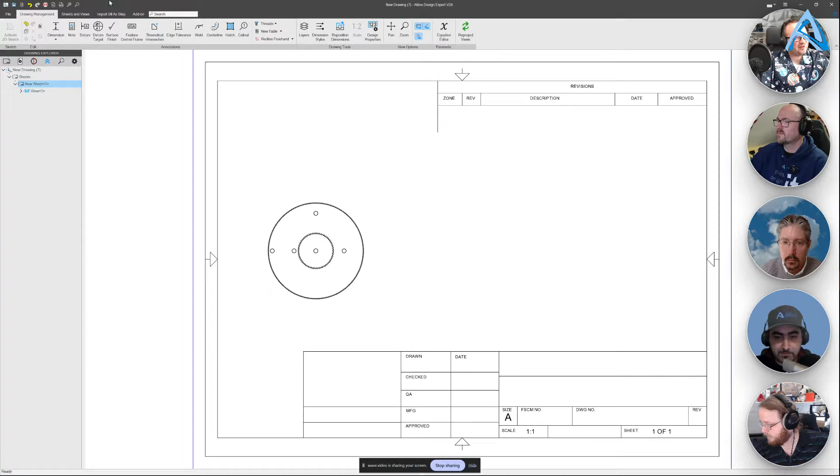And then we'll actually go to the bill of materials, and I'll insert a standard template. Now, it may seem kind of strange to have a bill of materials for one item, but stay with me here. If I double click on this, we can bring up our bill of materials editor.

And then over here, I can right click and choose column and insert, or just go to add column over here. I'll hit this X and remove everything. Then when I go to my properties, under design properties, there I have my weight. So I can add that as a column, and it comes in beautifully. Then I can just add this, maybe implement it right into my bill of materials or something like that.

I can also specify with a new name. Maybe we'll add in kilograms or whatever your preferred unit is. Now the question is, what if I want to change something? So I'll go ahead and save this into my PDM.

And then we'll say edit our 3D model. So if we need to change the material, right now we have 6061. I don't know, Chris, is that one of your favorite materials? Yeah, it's not bad.

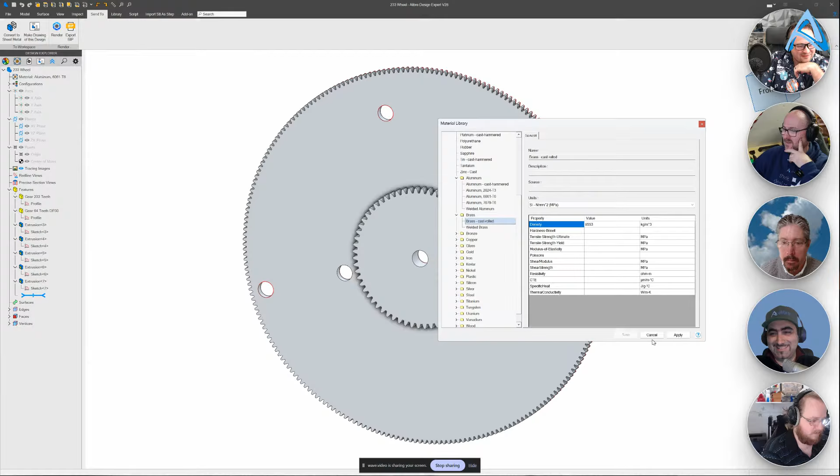It's easy to machine, that's for sure. Maybe we'll make a brass gear. If we apply that and save the changes, when we go back to our drawing environment here, I'll start reprojecting things. And sure enough, our weight updates.

So we do have a linked updating weight. Actually, the Alibre logo is blocking my beautiful face here, so I'm going to get rid of that for a sec. What if we have an assembly and we want to do this? So just a few finer points for working in an assembly.

I'll pull up my in-progress gear assembly. It's kind of half modeled right now, but you can get the idea. Lots of gears turning as we're loading this up. So we have this interesting assembly. I'll go ahead and make sure that I send the most updated version to a drawing environment. How do we keep track of weights in assemblies?

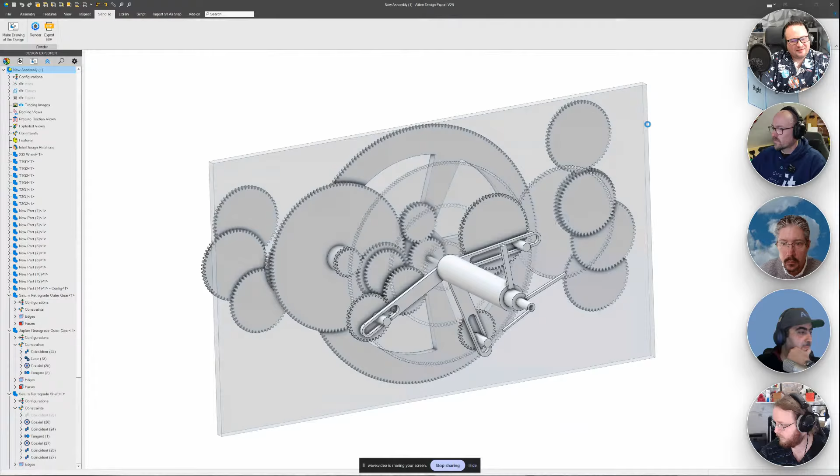That's awesome. Not to be a stickler, but if we're working in kilograms, is that not the mass of the part instead of the weight? I love it, thank you. I could be completely wrong, I am out of date on my physics, but that sounds about right to me.

I'm way out of school, I've got zero knowledge on anything now. In a previous conversation with Adam, he said he's not an engineer, right? But I think one of his ancestors is whispering in his ear right now. That is very correct, actually.

And it's the same thing about pounds. If you want to be very strict about it, it's kilograms of force as weight, right? But if we're honest, when we call out the weight of a part, we use the wrong word. We want to specify the mass, right?

Well, at least that's amazing. That's a comment that guys like me appreciate, Adam. Which is why we don't have many friends.

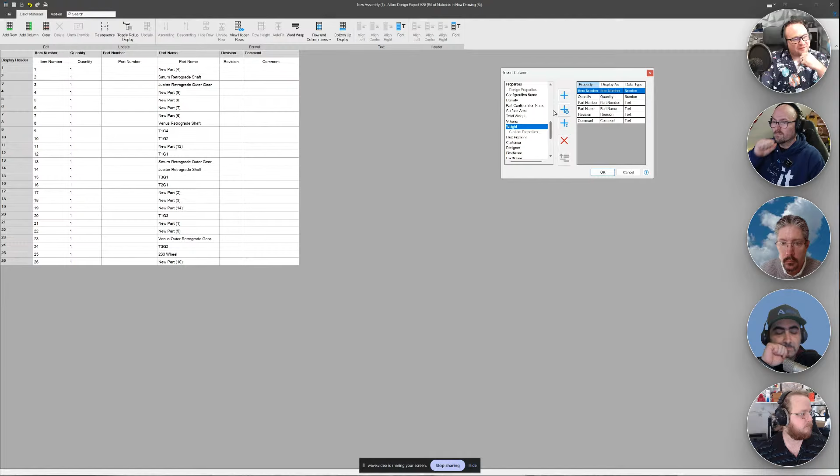Perfect, so back to assemblies here. If I add a column and scroll down, right under design properties, we'll add a column for weight. Takes a second because there's a few parts at play here. We're going to say design properties, weight. There, I click the plus, and now weight ought to show up.

There it goes. The obvious thing is we're tracking the weight of all of our individual parts, but we kind of want to know the weight of the whole assembly, right? So down here, I can right click and under column, we'll add a summation row for that column. And there is the total weight of our assembly.

So easy way to track things. These are updating properties and sure makes things easy. So that is how we do weight, a little bit different than working through the custom properties like we typically might. Hopefully for the person who asked in the last live stream, that's a great solution. This might be one to do a clip of and post separately, maybe.

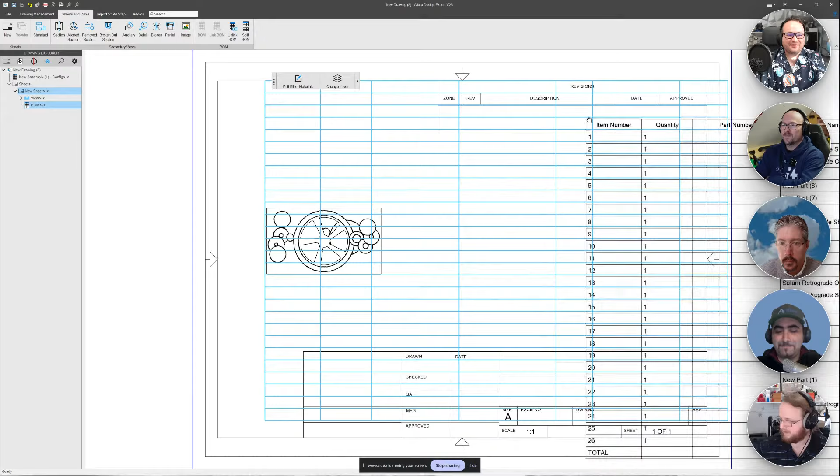Yes, we can see that. I've had a lot of background projects that's stopping me from doing the videos, but we'll be getting into that too, because that would be a killer clip.

Can I just say here that this has already been covered by Joseph in an amazing series of videos he did on drawings. This methodology here - if you need to output any sort of 2D drawing for your parts, you need to watch that series because I think I knew some stuff and I learned quite a lot. So definitely value there. Well, thank you, Costas, I appreciate it.

I see that we've got an EZ CAM user from Washington. That's pretty cool, an Alibre and EZ CAM user. Good to have you with us.

Absolutely. We got Fort Worth, Texas, Michigan. What kind of support does...

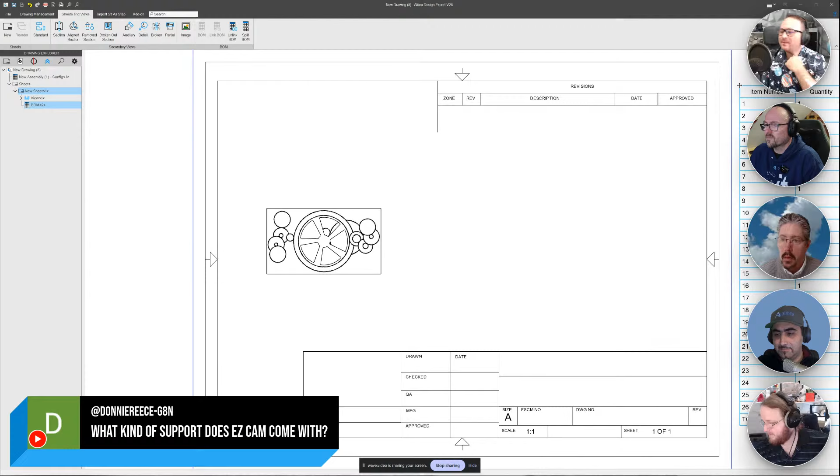EZ CAM come with? We offer a maintenance program through Alibre where you get a year of support. In that support, you get custom videos as well. So when you have a project and you're getting stuck, we'll work a video around your project so you understand it. If you have 2 monitors, you can follow along with that. I'm always posting something either on YouTube or Facebook.

I'd say there's a couple hundred videos out there. Now we're taking advantage of all those topical videos and placing them in AI. So if you have a question about anything about EZ CAM, or even Alibre, we added Alibre to the AI as well, so you're off to the races. We do have PC to PC sharing, so you can log on to my computer, I can log on to yours, and we'll interact that way in real time. If you have questions on the phone, I can take over your computer and give you a walkthrough.

That's awesome, thank you so much. I've got another one here: how do you show center of mass on a part?

I can take that one unless someone else is hungry for it. I know how to give you the actual location of it in the physical properties, but I don't know how to show it in the part, if that's possible. Sounds like a really good one. Yeah, that's a great question, thank you for asking it.

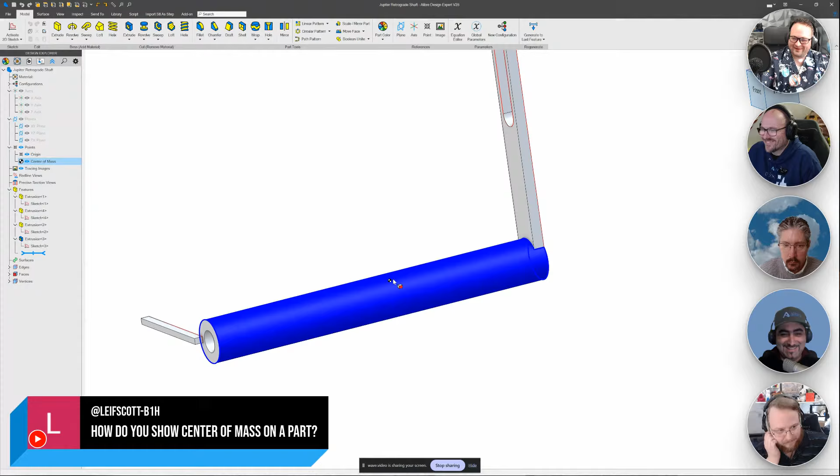I'll grab a kind of odd L-shaped part right here. In our design properties, we have the center of mass, and you need to have the points showing. Oh, thanks, Costas. Yep, so there's our center of mass right there. Just be sure to show your points, folks. Nice and easy - you can dimension it and all that. So that should work.

What else have we got here? Oh, here's a good one. Does EZ CAM have post-processor capabilities to work with small Makera CNC machines? Okay, are we talking lathe or mill? Our post-processor library has hundreds of post-processors available, and they make excellent templates.

And again, if we're relying on AI, what would take me hours to do, AI spits out in a minute, and we'll add what you ask it to add to the post-processor, remove it, or rebuild it for you automatically. I've been developing post-processors for over 25 years now, so in most cases I can deliver something based on the information I receive. It can be a quick turnaround.

We ask that you send us a sample program that runs your machine. Sometimes we require the manual - some people take pictures if they don't have a PDF copy. So yeah, we support anything that has a servo motor attached to it. Maybe 5-axis positioning, not wrapping yet.

I had this machine back here - I was using EZ CAM but didn't have a post-processor for it. I reached out to Chris, and he got me a post-processor. It was an awesome process and quite painless. So I've experienced the support there, and it's been really good. Chris does a great job.

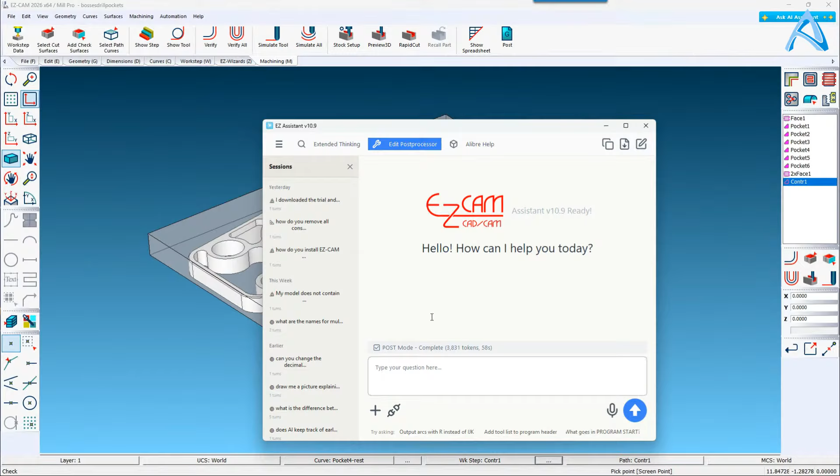Drag this over. Now that's my active post processor. Let's get this back over here. And I'm going to load it. There's load the post processor. Edit post processor is up at the top.

And it automatically uploaded the CNC file, which is all the data, all in one file. Whereas the post processor, you have program start, you go into different sections to build it. This is all of it tied together.

And I just need to ask it a question. Let's say, add a tool list to the beginning, and everything that is needed for CIMCO simulation. That's cool.

That's pretty cool, actually. So for the uninitiated, what does that actually mean? For the person coming new into CNC, what does all what you just said mean?

So the CIMCO, what is that? Sure, I was going to get into it when it pops up. CIMCO requires a setup of your stock. It requires tool lengths, tool diameters in order to get it right. So you would have to build a library. Well, in essence, what AI is doing for me is building all the background information that makes CIMCO simulation work. It's all being generated here.

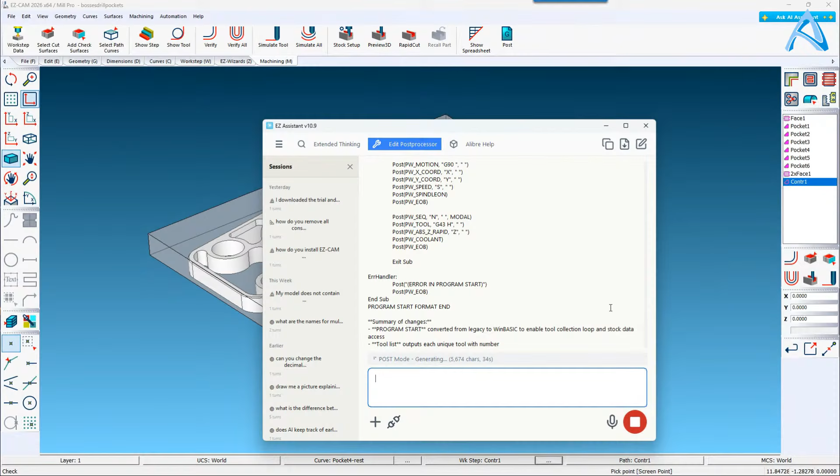Now we had the legacy CAD, legacy code, and now we're building what's called WinBasic, building basic code, and it says save and import to EZ-CAM. So I made all the changes. This would take me hours to do otherwise. So now we're going.

Let's see. All right, let's post it. Just walking through my operations. Let me just drag CIMCO over onto the main screen here. Okay, so that was the legacy.

I may have missed a step here. Let me remove that, I apologize. Doing everything live always gets you.

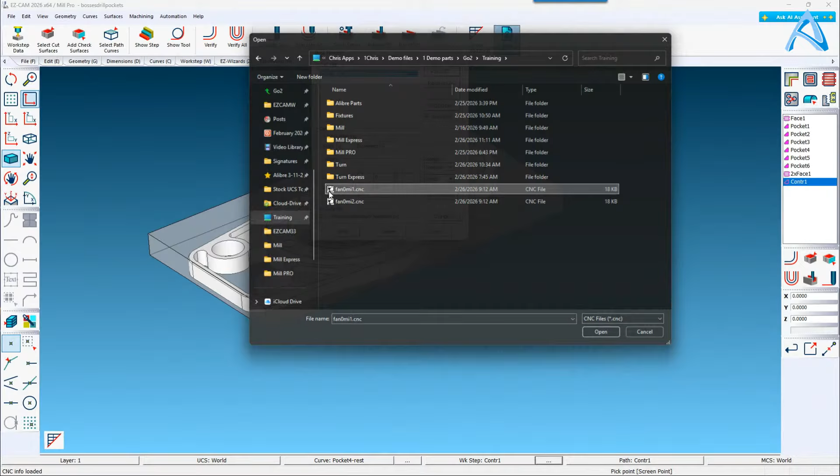Great new tool, this is recent. This is something we just had developed. Our developer is outstanding, what he can do just blows my mind. So let me get here in training, upload the FANUC post processor. I'm going to post it in regular code.

And it's going through the strategies. I see that, nice, right. Okay, so... pause.

Okay, so here we have it. We just have that, there's our spindle, the direction, the coolant. If I was using coolant it would show up. So that's the old program style.

Let's go to our AI assistant, let's just run it through again. This is good, you guys will get an opportunity to see it again and solidify it. All right, so it's uploaded my CNC file. Ask the question again, maybe I can do a copy and paste here. I think that if we repost, because I think that was a CIMCO thing.

Okay, all right, let's see. Post, CIMCO is a great program. Oh no, it's still the same thing, huh? Okay, yeah, I didn't run it through the AI just yet. So I'll come down here, Control V. There we are, send it up again. It's pretty quick.

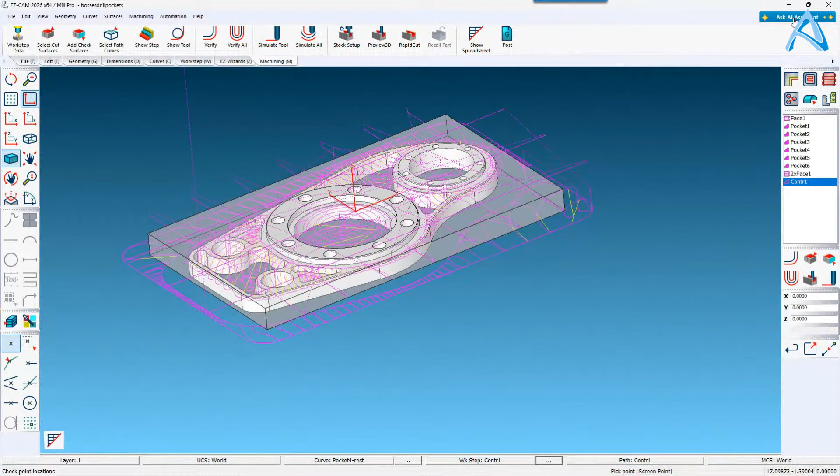Let me just clear the conversation. Post mode, I'm on post editor mode. This sends it up - attach the current post processor from EZ-CAM.

Now Chris, I've got a few other questions I can hit if you want to work on this in the background. Yeah, please - why don't we do that to keep a nice even flow, and then I'll just go 'yahoo' when it's done.

We did it, first try. Well, that's a great one.

Yes, this one is a little bit less asked about, but I really wanted to get to it if I can find it here. It's about educational licenses. Let me hunt it down in the comments. I just saw it - right here, I got it. Thanks, Adam - Adam's the hero that saves us all.

Do you have any plans to offer education-based licenses, college and K through 12? I think if you're looking for something big, contact help@libre.com or hello@libre.com - send an email there if you're a school. We also have $100 for pro and $200 for expert with a valid student ID. So keep that in mind if you are in the educational sphere.

I also have one: will AI be part of a permanent license, or do you have to be under maintenance to make use of that?

I think that's for EZ-CAM when you have a second, Chris. Oh, what was the question again? Wow, this is - I'm sure. Yeah, will AI be part of a permanent license, or do you have to be under maintenance to make use of it?

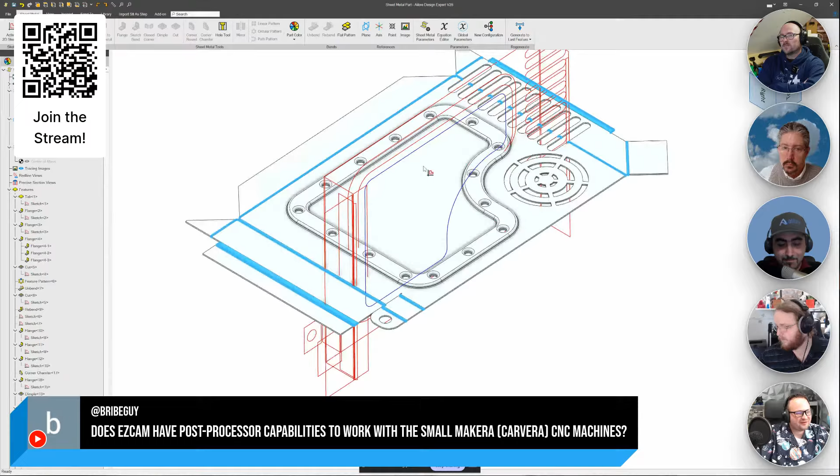So for sheet metal, does anybody want to take that question? That's a nice looking part too. Thanks, this is from our beginner course. Check out our beginner series, we make this video by video. We have a flat pattern that we can flatten out, and you'll see that our stamped area stays, because generally when you do something forming, you do that first and then cut out your blank for sheet metal bending. But how do we calculate the lengths? Different materials are going to have different bends and stretching when you go to bend things, so we use K factor.

Let's go with adding a flange here. Now when I go to add this flange, I can go to advanced over here and see that we have K factor, and we have a built-in K factor value for whatever material we want to use. Under bend allowance options here, we also have unfold lengths, so we can set it that way as well. When we go to flatten things out, those bends and stretches are built into our flat pattern, and that would be the approach I'd say we use to calculate sheet metal part cutting lengths. Hopefully that answers the question.

I haven't been a career sheet metal guy, I've only used it a few times in the field, so maybe there's more to that question, but that would be my short answer. Let me know if I hit it or not.

I'll second the comment, there's nothing AI about Steve's channel. In fact, I've watched him fix headphones live on the air. That was my favorite live stream moment, because I'm sitting there going there's no way Steve can fix that circuit board on those headphones, and it worked. And I think you're wearing them right now. Look at that, there you go.

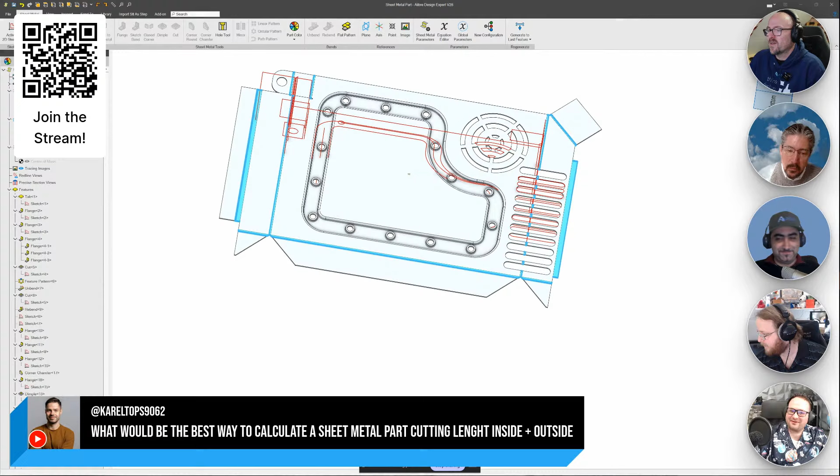Speaking of AI, I had some success. What happened to me was I had opened up multiple documents, figuring I'd save time, and what I did was I was working with a post processor from the previous program. So here we have our stock information, we have our tool list, that's all been added. If I go in to post, and we're going to save the CNC, we want to make sure we save it, I'm going to go into the editor.

We'll go to formats, program start, and now it's all Visual Basic. Yep, there you go. Okay, yep, so sorry about that, guys. Golf clap for Chris. So sorry, but... former mediocre machinist here.

Question: first of all, CIMCO is a great program. I loved it, especially when I realized I can actually mirror a code inside CIMCO without even needing to go into CAM, which was useful on more than one occasion. Does CIMCO come with a license of EZ-CAM?

Yes, it works a couple of ways. If you're on maintenance, then if you have a perpetual license, at the end of your maintenance you'll be stuck on the same version, I believe you won't have any upgrades to that. It's looking at your license. If you have a subscription service, of course you maintain that, you're going to have it. And if you don't renew, EZ-CAM will know that, and you will not have access to CIMCO.

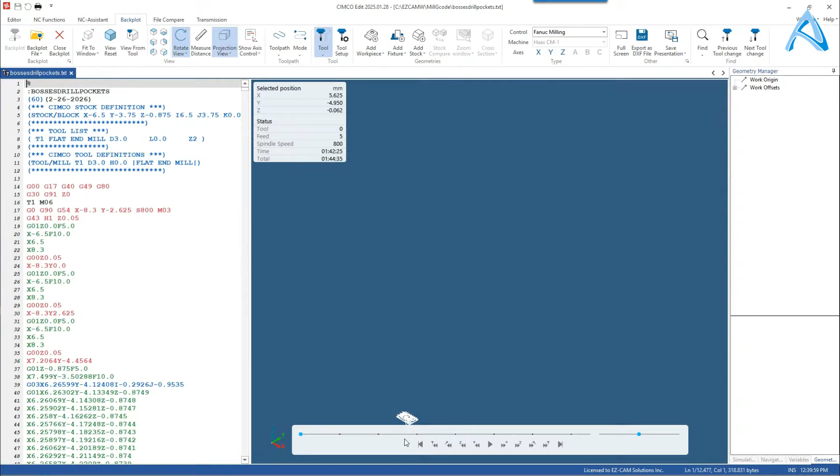Just opening CIMCO now. Then what we're going to do is go to the backplot. Okay, so this is so useful, guys. This is so useful. So here's the wireframe. Even that is extremely useful if you know what you're looking for and how to read it.

Exactly. And if we didn't have the post processor developed for that, you would have to go into your tool setup. Even tool setup, I know. Yeah, tool setup, which means making your tool libraries twice, which is not practical, right?

Let me just simulate the stock here. Add stock.

And a special thanks to Don Reese. I love that comment, I'll show it one more time. Chris is really good about helping, and I always get quick responses from Chris.

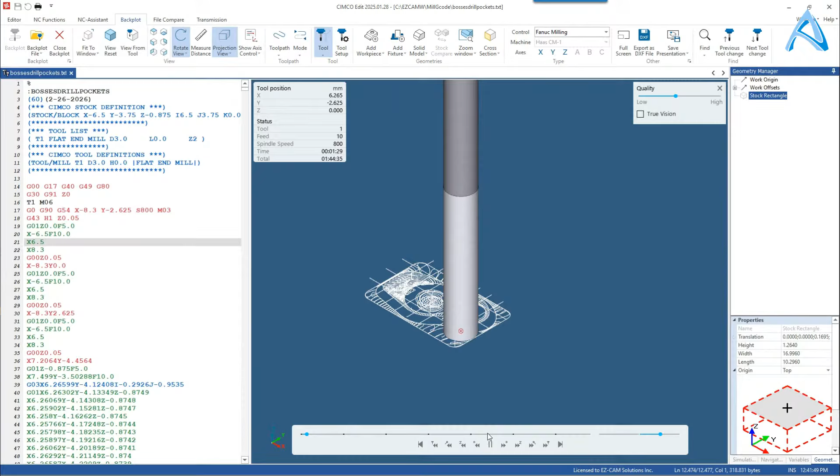Now, I don't know if I knew that you were such a great machinist, Costas. You're like an onion with new layers of surprises. I'm not that, no, because I've come to learn to respect the word machinist, okay? And I'm not. I'm a decent CAM programmer, but I'm a very mediocre machinist, trust me on that. Well, that's a step above me, I don't know about anyone else. The more I learn, the more I realize I don't know what I'm talking about. Yeah, but isn't it like that? Isn't it amazing that it is like that? Right? And it's so paradoxical that those skills to not know what you're talking about is also correlated with competence.

Yeah, it comes to bite you, doesn't it? Anyway. Yeah, the first thing I learn is where do I not put my hand. Next to the big spinny thing that's eating the metal or wood is probably a good start.

Start at the basics, you have to bear with me. I'm not going to lie, I don't remember how to set up the stock on CIMCO either. I think if you go to add dimensions, you can give it some dimensions for the stock, but it was supposed to get that out of EZ-CAM. So you know what, my fault might be that I have the stock.

Go back through it. As you're going through that, I'll bring up one question that looks pretty good here.

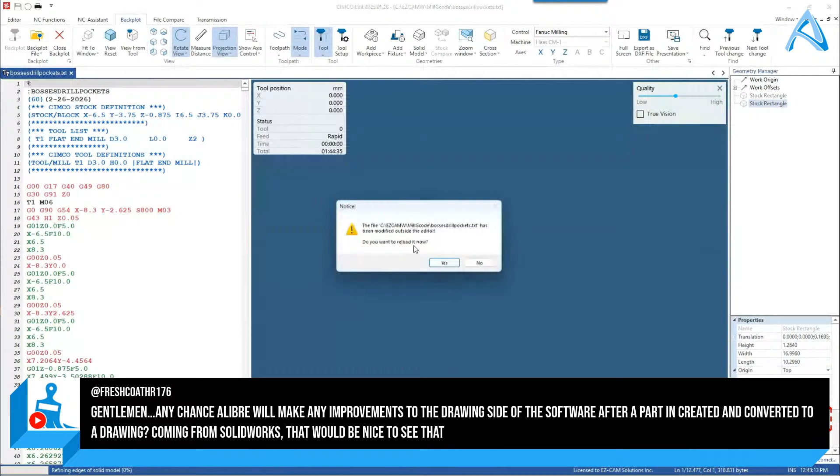Any chance Alibre will make any improvements to the drawing side of the software after a part is created and converted to a drawing? Coming from SolidWorks, that'd be really nice to see. And yes, I've tracked a lot of drawing requests on the forums as well, and I'd like to see that. I think in V27 or V28 we had some enhancements that were highly requested, and we always want to keep improving that. So don't feel shy about submitting an enhancement request from the home screen of Alibre, and we can get that taken care of for you.

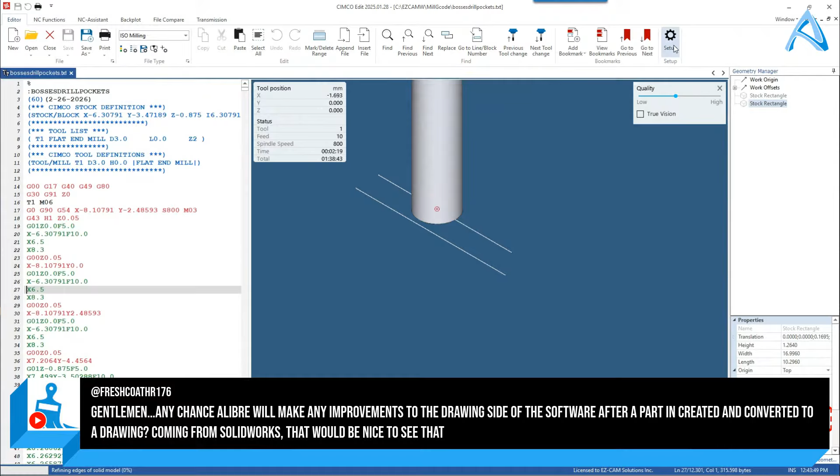Remember, the biggest thing with an enhancement request is to tell them why you want the feature as well, because going from that kind of perspective helps them add the feature. Adding features without knowing why you want it can sometimes be a bit of a blind battle, right? They want to know why so they can make it that much better for you. So remember, when you submit a feature request, say this is what I'm looking for and why, this is why I need this feature to use the software.

Why it helps you, because like Max has gone with importing STLs and things. Importing STLs can be used for tons of different reasons. Thanks, Adam, that's a great point, because if we know, do you want to import an STL just to measure around it, or do you want to import an STL because you want to modify it? Those are two different cases and two different timelines for implementation, and maybe we can get some useful features out. So thanks for bringing that up, Adam. It's worth mentioning feature requests, because maybe they do add some drawing features and it's not what this person is looking for or how they want to use it.

So yeah, for sure. Now Chris, I think I took enough of your time. Sorry, Costas. Yeah, I was just saying I quite like the drawing environment in Alibre as it is, but if anybody has got any ideas on how to make it better, by all means. Absolutely.

Sorry, Chris, sorry for that, that's not even an EZ-CAM question. I asked, I got a bit carried away if I'm honest. But yeah, I remember it's pretty easy to get a block going, but then you need to locate it in CIMCO. So I'll have to figure that one out. I'm sure it's just something simple.

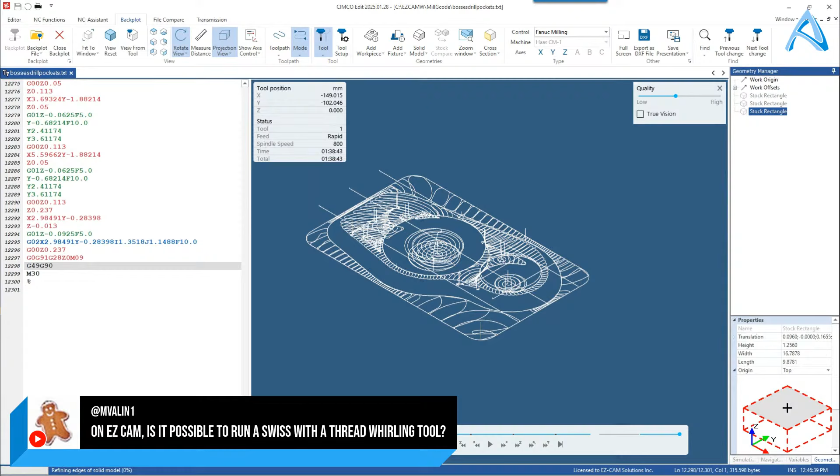Perfect, I think we got clapping there. That's good, yep.

Can hear a hard drive. That might be my server. Let me unmount my server here, and maybe that'll quiet it down. Thanks for letting me know that you can hear my hard drive.

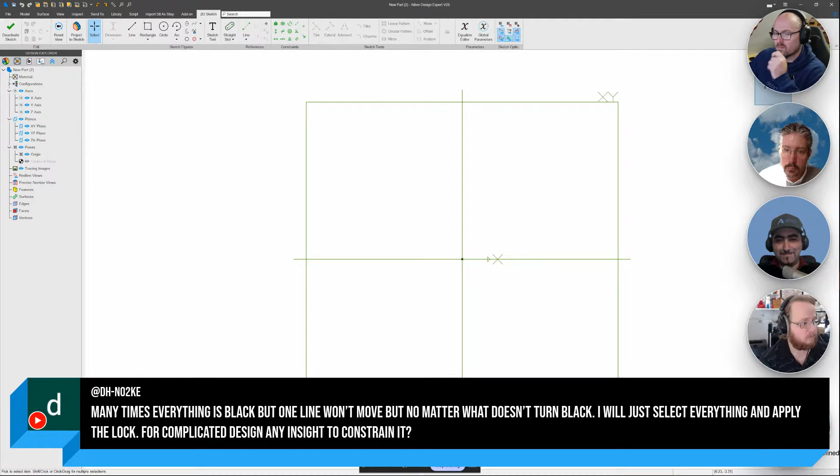So I see many times everything is black, but one line won't move no matter what - it doesn't turn black. I will just select everything and apply the lock. But for a complicated design, any insight to constrain it? And that is an awesome question. So when I make a sketch, it really is about the sketch solver. Here in my lower right, let me hide that comment so you can see - I get a little magnitude position undefined, magnitude defined, position undefined, and fully defined. So we'll go through what those colors mean.

Here, if I make a rectangle and give this a length, this turns orange, as well as this one, because we now know the length. So magnitude is defined, but we don't know the position. I can move this line around, but no matter what I do, the length of the line does not change. Now, if I start adding some dimensions—and this isn't necessarily the best practice of how to dimension something—just to show, this line now turns black because we know where that line belongs and how long it must be. So I think our user is asking...

Sometimes everything is defined, but something doesn't turn black. That happened to me back when I was a career SolidWorks user. It's happened in FreeCAD, Onshape, just about anything I use. This is down to a sketch solver—there are algorithms that determine what the degrees of freedom of sketches are. Sometimes a sketch is applied in a way that is correct, but the algorithm kind of fights it, so something may not appear fully black.

Often, if I know that my sketch is fully defined, I just ignore it because I know it's the dimension I want, and move on. Sometimes, if I really need to troubleshoot, I can delete some constraints and constrain it in a different way. For example, in this case, maybe instead of having this one right here, I can delete that, or delete a vertical, and try different constraints to get the same solution. Almost always that clears it, but it's kind of a back-end algorithm, and all platforms have this—it's not a unique thing. So that's my approach. Anybody else have any comments on that?

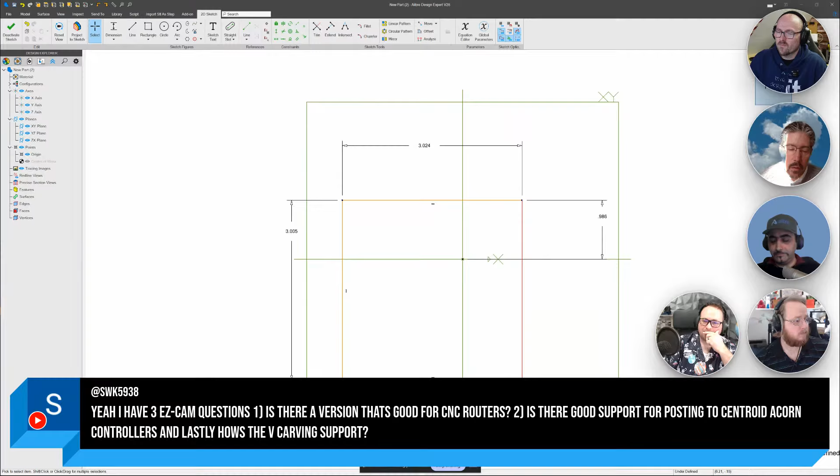With the Centroid, we already have the post processor for the Acorn, and with routers, we support routers all throughout the world, and there won't be any issues. But the version of product you need—the Mill Express handles some 3D machining. You don't get a nice uniform toolpath, so sometimes you would have to create and combine strategies. So it takes longer to produce the part for a good finish, but you can achieve it in the Express. The Mill also has a wizard that goes along with it, making it easier to walk through, and some advanced toolpaths, though not as powerful as the Pro, as you'd suspect.

The Mill Pro offers, so you know the difference, plunge milling—so if you're going to hog out a lot of material fast, you'd use plunge milling. It has pencil milling, it has re-roughing. So if you go in there with a large tool and want to go back in and get those corners, you don't want to have to manually set those boundaries and go back to curves to do that. Exactly, so Mill Pro calculates all of that for you.

It offers a nice uniform step over with our equidistant, so it doesn't matter what the surface slope is—if it's a vertical wall, it gives you a uniform toolpath throughout. It's not like the projected toolpath where you have pocketing and get a step over coming up against a vertical wall, or say there's a slight taper—when you step over that quarter inch, you could miss the surface completely. The Mill Pro takes care of that for you. It's definitely an investment, but if you buy the Mill, try it out, and want to upgrade, it's affordable to upgrade.

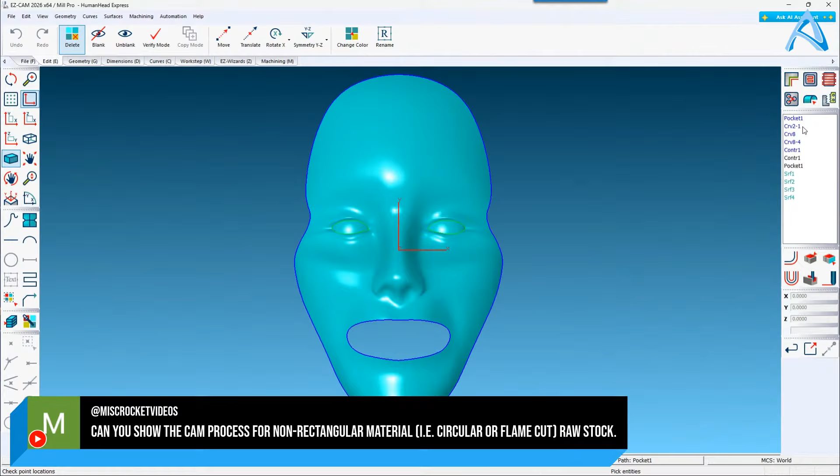Well, that's cool actually, and that was just a silhouette boundary curve. So let me delete the curves and I'll get to the question right away - your curves, silhouette boundary curve.

My other screen has the... what am I getting? I'm locked out here. Maybe there's no... my main screen had the command menu. All right, so silhouette boundary.

Oh man, that's cool. Now let's say I want to offset that and make that custom stock. Then what I can do is go into curves, offset, and give it a distance. Wrong direction.

So we'll give that a name - edit, rename. I should have named it when I made the curve. And this is going to be stock CRV. Rename. Then I'm going to give it some toolpath - let me just go back to that silhouette boundary curve again.

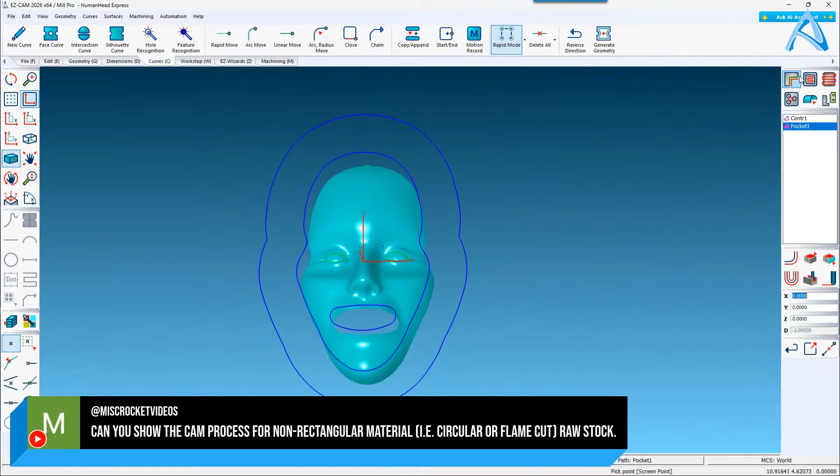Make a contour, 1/2 inch, multiple passes, stock allowance 0. Total stock, let's say there was 1 1/4 inch. Cut step, with a 1/2 inch cutter, we'll step in maybe every 200 thousandths.

Now we're going to make that the stock. So if we take a look at the stock as we have it now, a rectangular block of stock, go into stock setup, and I just changed this to custom stock. And what it's doing is looking for the name stock CRV, and it will give me the shape - as you can see, our stock shape.

And you can do that with a solid model as well. A solid model can be any shape, and it can be imported into EZ-CAM as an STL file, and you can do the same thing.

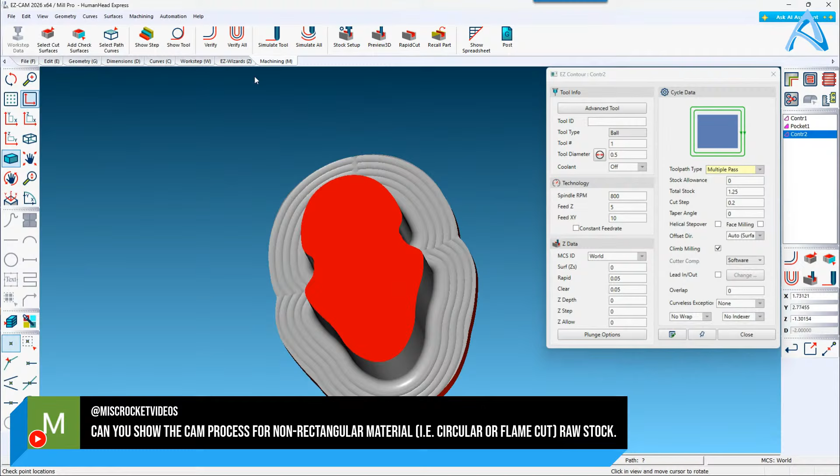And that can be - let me do that. I have an example from an Alibre... what's this? Oh, Pro. I think my sharing button got in the way.

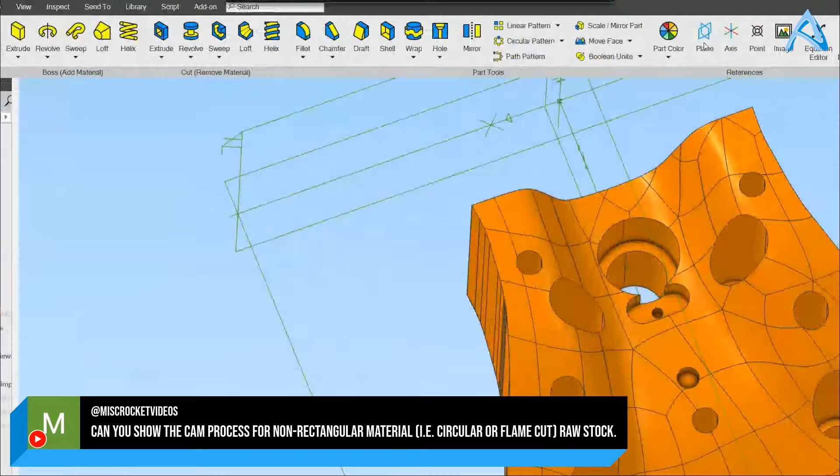This is a good example of our relationship with Alibre. So here I have some suppressed faces. Yeah, okay, so that'd be my stock, so I would want to machine what's underneath it.

So I'm going to go over to our add-on, EZ-CAM Sync. Come on, really cool. I'm going to transfer this - you can transfer it as a part if that's what you're going to machine. I'm going to transfer this as stock, and that comes in as a white model, or see-through.

Then we come into Alibre again, we'll suppress these features. I moved it out of order. Come on, there we go. Oh, there we go. All right, there we go. I wanted that, I'm sorry.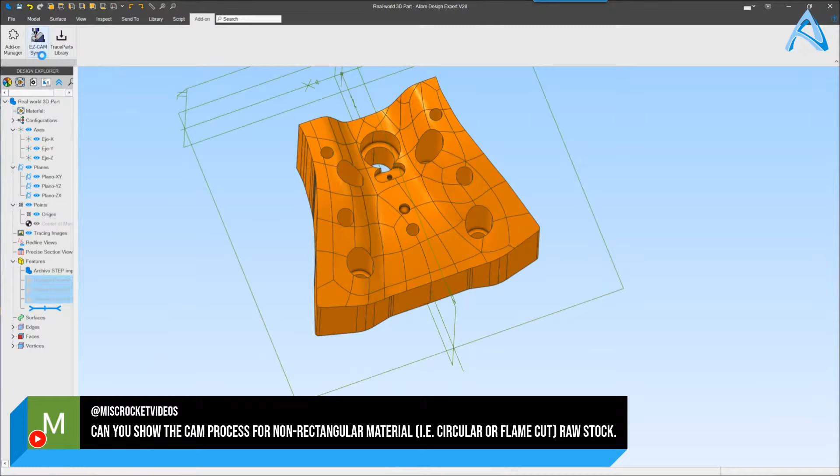Suppress them. Okay, now we go over here to sync, transfer as part. You see we've capped our holes and complex surfaces.

Now we'll add 3D machining toolpath to it. I'll be, let's see, so finishing, equidistant, ball end mill - yeah, we'll go with 12. Step over - I'll have a large step over so there's less time to calculate.

I want to interrupt it just a second here. I'm going to give it a negative finish allowance, so we're going to actually see it go in and cut.

This is what I was talking to you about, Joseph. It takes a little while for these things to calculate. That's all right.

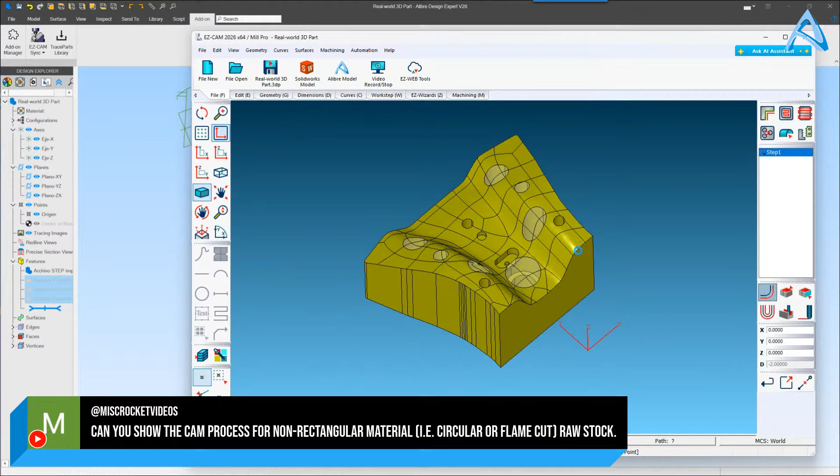Here's an interesting question that's come up: why should the lock constraint be avoided? I just answered that in chat, but let's discuss it as well. So when you lock, first of all, the lock constraint is applied to specific sketch elements, right?

It only applies to the ones you select. If you select everything, it applies to everything. But a lock constraint goes onto every single different sketch element that you have selected. And because of the parametric nature of Alibre, and how the sketch is handled, when you constrain a single sketch element, it has far-reaching implications. It might constrain some degrees of freedom of the elements around it, or an element all the way on the other side of the sketch, depending on how you've set it up and what the design intent was when going in there.

So basically, you avoid it for two reasons. First of all, you negate any parametric capabilities that Alibre gives you, and secondly, it is very, very easy for the lock constraint to have an effect that you are not anticipating. That's what I would say.

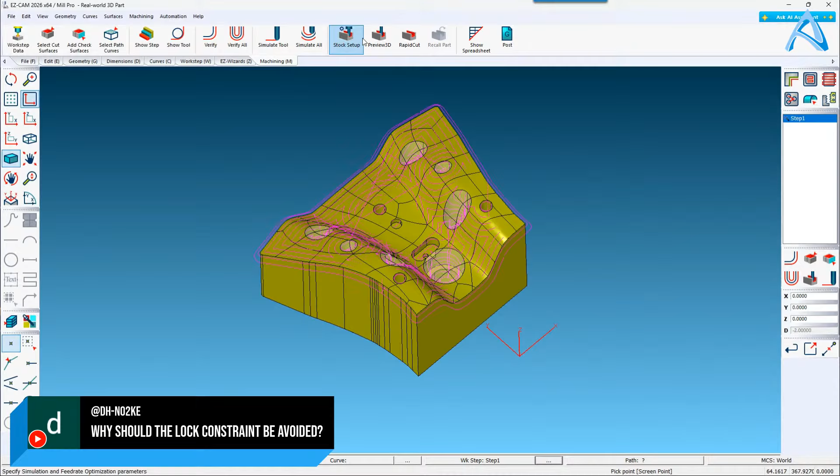I'm ready when you guys are. All right, I just had to switch to our faces to make sure that we were communicating well. Can you all hear Steve? Yep, I can hear him fine.

Yeah, cool. One of the reasons I use the lock is if I'm projecting from a piece of geometry, and that needs to be trimmed or altered. When you keep the constraints from the model, it doesn't allow you to trim. That's my experience. Maybe I'm not sure if that's just the nature of it or if I'm doing something wrong.

So I'll apply a lock, and then I'll sketch around things so that as I'm dimensioning other elements, the line that I'm adjusting doesn't move, or the line I'm projecting doesn't move. And then I'll remove the lock, then trim, and do all the bits and pieces that I need. So I jest when I talk about using the lock.

That's actually okay. So Steve, they're showing why he's genius, but that's a great use of the lock constraint, like a temporary lock. I like that, that's a great use of it. Yeah, that's a good lesson. Never underestimate Steve. I've been living that one for a while.

Anyway, Chris, you're showing us this carve. Yeah, that simulation was really cool, actually. Here was a good example of transferring the part from Alibre as a stock, and then we're cutting into the model. It's just a rough example, but sometimes when you go out and get something heat treated, you've got to remove just a very little amount of material. So this is a good example of that.

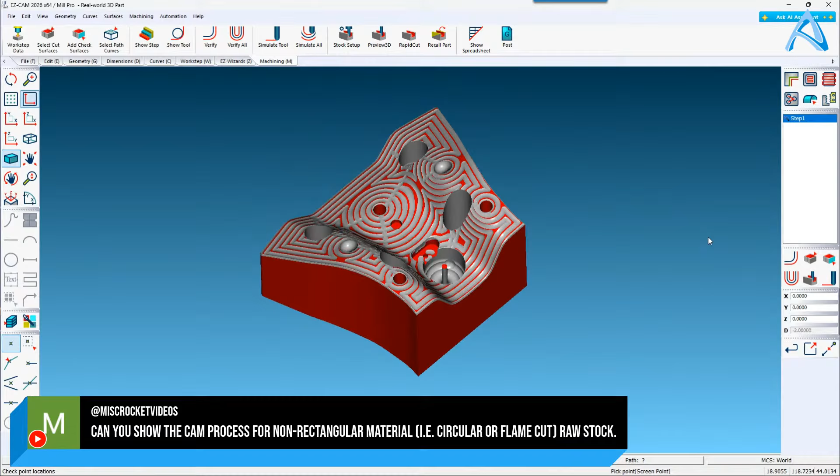And if that's it for that question, I think we've got a few rapid ones for you. Sure, what is the price level on EZ-CAM?

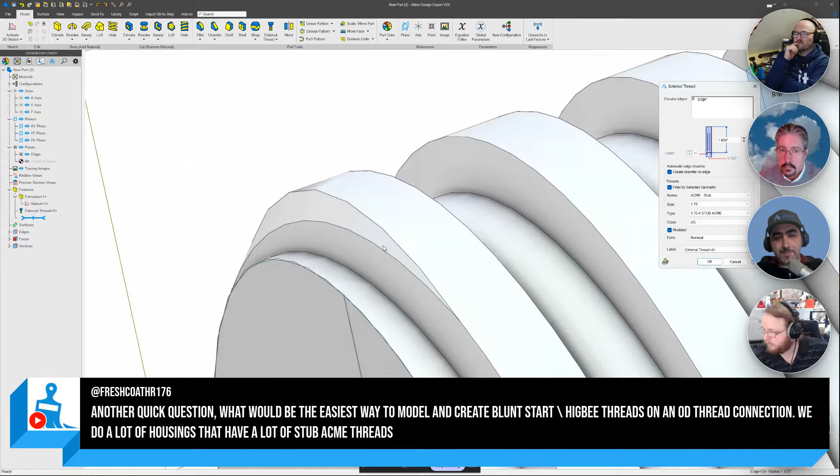And then, depending on what you want by blunt start, we have the chamfer right here, so we can automatically chamfer the edge. Not fully a blunt start, though. So if you're going for just quick and easy modeled threads, I would suggest Acme stub with a chamfer. Otherwise it's kind of down to making your own blunt start yourself if a chamfer isn't good enough.

I want to look into doing that, so let me put that on my video list. I know someone asked me earlier about our upload schedule, so I need to get a video out anyway.

So we'll add a way to do blunt start, because blunt start is a little bit different than a chamfer. But if you're happy with a chamfer, that's how you do it, quick and easy.

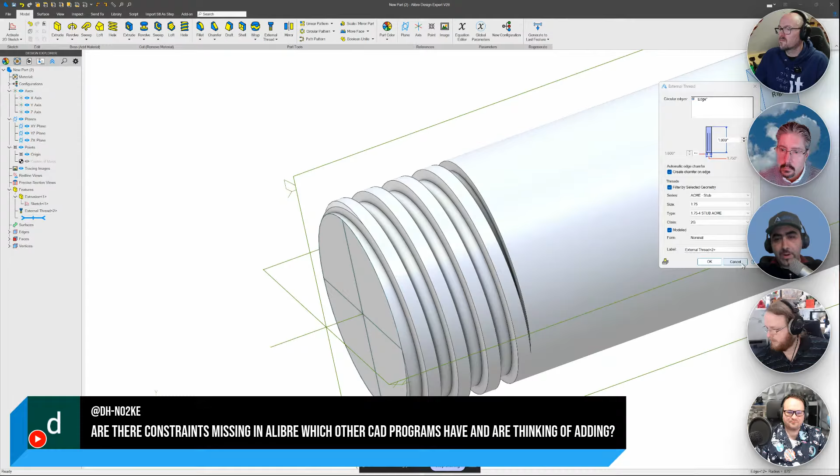If we want to be very precise here, I'd say Alibre has one constraint in the sketch environment I've never seen in any other CAD system: a second way to use the midpoint constraint, using 3 points. Let me switch to my screen, Joseph, so I can do a quick demonstration. The midpoint constraint in Alibre can be used with points only, and here's how it works.

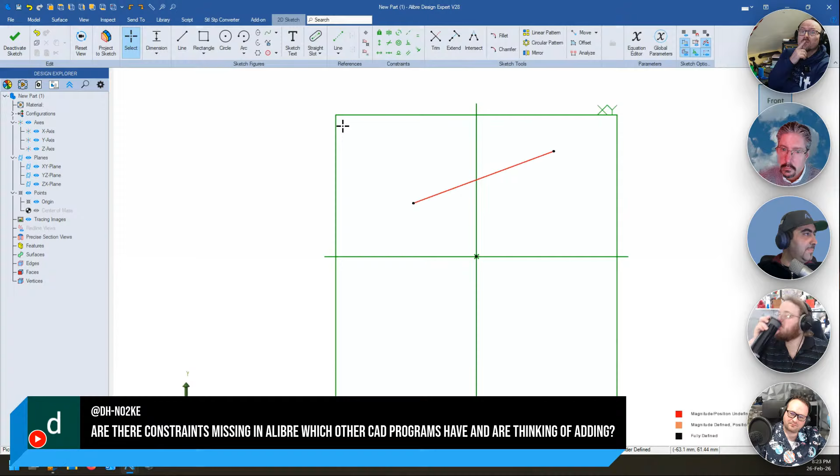Let's say we've got a line here, and I made it crooked on purpose. I'll use the midpoint constraint, click on this point, click on this point, then click on the origin. You'll see what I've done now tells the system to place the third point. So basically the first 2 points you click on define a linear segment - of course here it's already a linear segment, but it can be anything, even projected points.

The third point you click on forces the system to keep that third point on the perpendicular bisector of the linear segment defined by the first two. It doesn't become the midpoint, but it's forced to remain on the perpendicular bisector. I haven't seen that in any other CAD system, and once you get used to it, you use it a lot. It saved me a couple of dimensions in complex projects, for example - that's really cool.

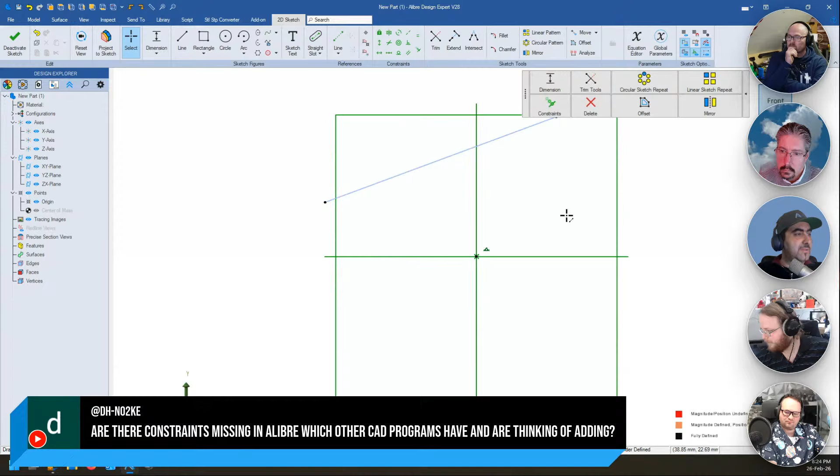Now, what Alibre is missing isn't exactly a constraint - well, it is a constraint, I guess, in the assembly environment - it's the mid-plane constraint that SolidWorks has. That is missing in Alibre. You can work around it, but that would be the only thing I'd say is missing. It's being asked for enough that I'm sure the developers are considering it after V29 comes out, because they have their plate full right now, but I'll bet we see it in the near future.

One constraint I hear about a lot, and that's high on my list, is the mid-plane constraint in an assembly. There's some. Yeah, that's what I meant. Oh, I guess I didn't say it correctly. Yeah, exactly, okay, I'm with you.

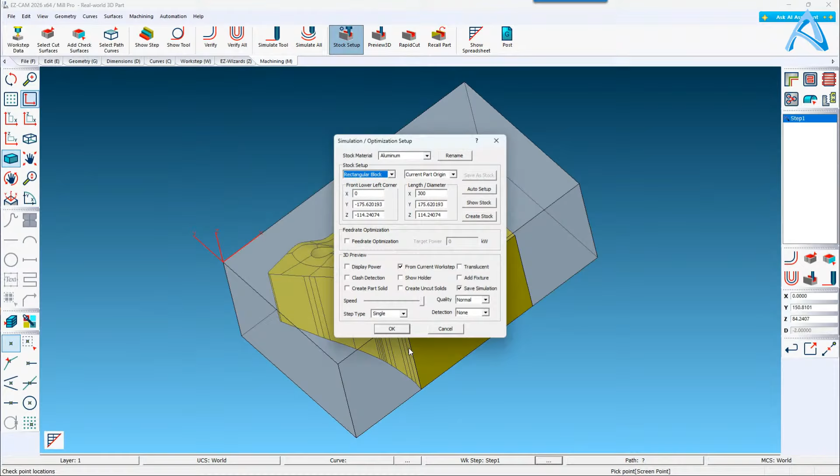Let's see. Let me make something simple here.

Turn this off. Right, and preview - there's our cylindrical stock. It was wrapped up based on the size of the block itself.

If you have round stock, you're going to want to go to the stock setup if you're not going to customize your stock. In EZ-CAM, you have either a block of stock, round stock, or you go through your custom stocks, which is something you'd build, preferably through a library.

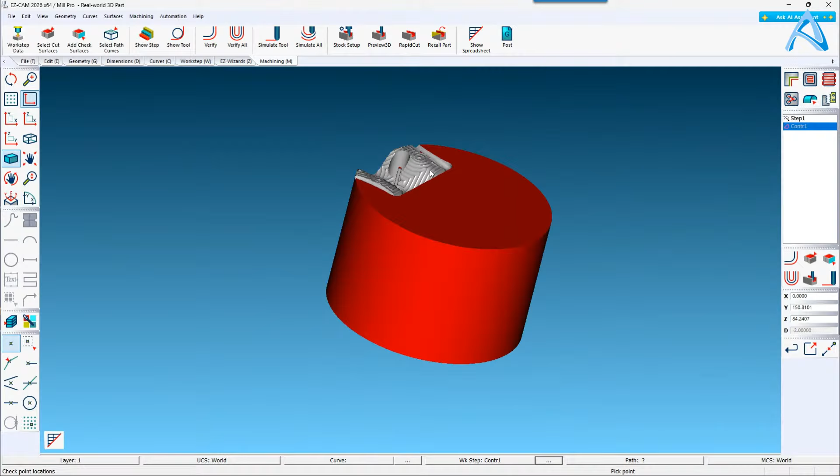Bill, I'm late - was I supposed to bring the tacos? Yes, in fact, the stream crashed due to a lack of tacos. I'm hungry again. You should have an alarm set by now - right around this time you bring the tacos. That's probably why the stream's crashing every time. At least get Taco Bell or something.

I'm seeing one - how does the toolbox in EZ-CAM process work? That's a nice one, the toolbox in EZ-CAM. Yeah, that's a fantastic tool.

You can convert metric to inch, geometry to metric in just a click of a mouse. You can pick curves of the current work step so it can be added to another work step. We have set the drill diameter for the current work step, so we take care of that now.

The drill diameter, that's probably old school - there's a button right here when it's sized up to a drill. Matter of fact, with the tool diameter, that can be sized up to any corner radius.

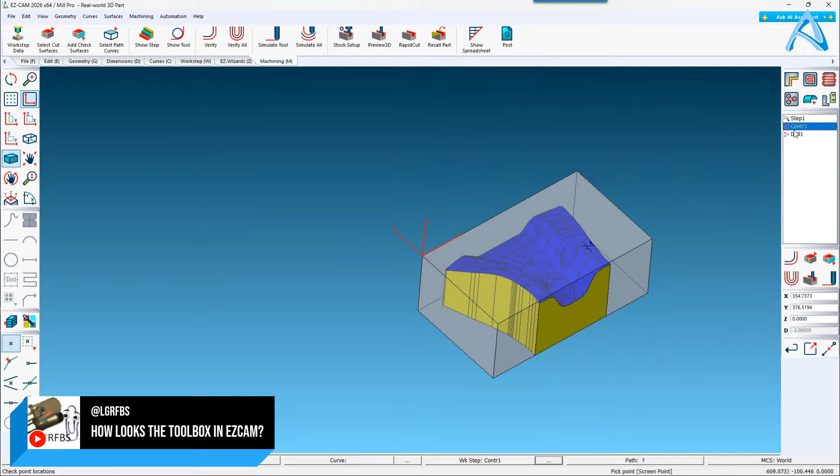So if I were to click enter, this should give me - let's go to a drilled hole, let's go here, that guy right there, and enter, calculate - and it gives you the diameter. So in the toolbox, that's not really required any longer.

Set first feed - a lot of times when you have your first feed in a pocket, if you have a value set there, when it starts in the center, it knows it's cutting more material since the whole diameter is going through the material, so you want to use a slower feed. In some instances you just don't want that - you can set it to 0 here automatically.

If you're cutting one way and not zigzagging across - always climb milling - at the end of the pass, at the end of the sweep, it wants to rapid back to the next position to start the sweep all over again. Well, it's not a rapid move - it's actually the highest feed rate your machine supports, or you can cut it down if you want. You don't have to go at full feed rate.

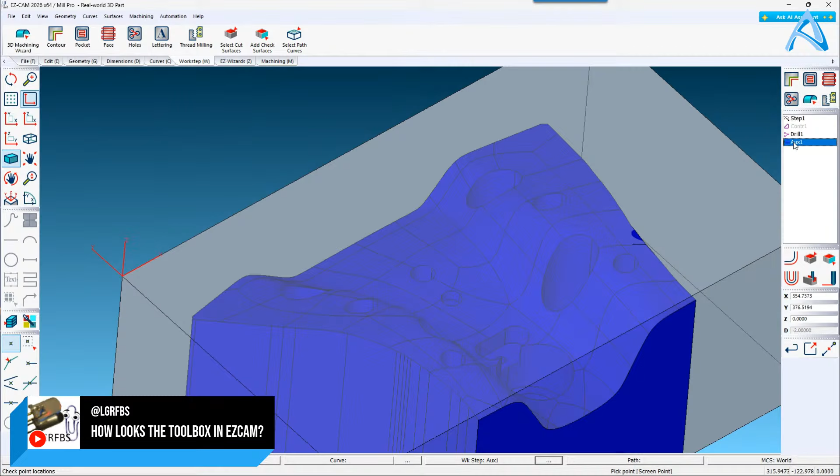Hit close, that gets inserted. You can adjust the location by using the left and right arrow keys. Left moves it up, right moves it down.

So if I want to separate, you can make the entire program when you go to post your code, but when it hits the auxiliary function, it's going to throw an M00 in there if you set up the post processor that way. So this auxiliary function is just our way of throwing in any amount of code necessary between operations. That's really a nice tool, but I don't see it getting used enough.

I haven't had that many requests for post processors. But this would be like I was saying, to make a program for a probing cycle, setting up boundaries or what have you. I'm not too familiar with it, but anywhere that auxiliary function is located is where it's going to insert custom code.

So that could even potentially be a dual spindle handoff. We do have, well, in the turn, we do have a handoff. You do have that. Oh, okay, it is built right into it. Great, actually. That's actually cool. I'm telling you, for that $2,000, you're getting a lot of bang for your buck. I mean, yeah, exactly. Yep. There you go.

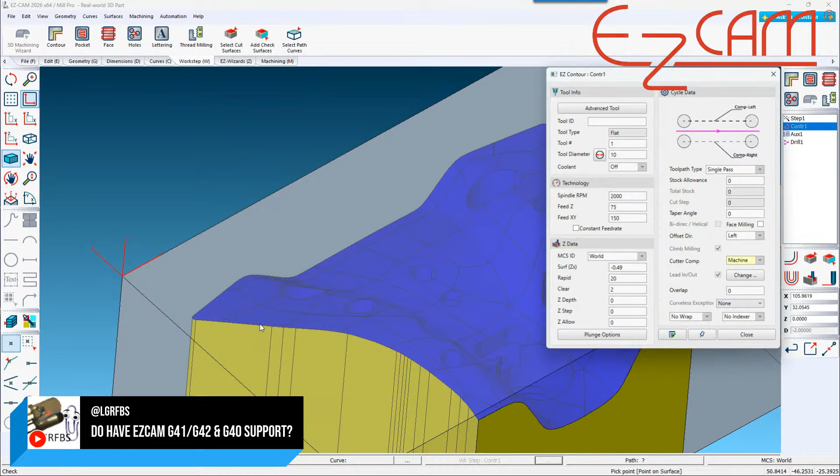Let's say I was machining the outside edge of this part. If I have machine set, the G code is actually centered on the path on the outline of the stock. So in your machine, you have to put in either your diameter. Some machines require a radius, so it's based on whatever your control is configured for. If you choose both, EZ-CAM offsets for the radius of the tool, so the tool is outside the model, and you can put in a wear value in your machine register.

Typically, with both, that's most commonly used with G40, G41. So your tool register has 0 diameter. And then if you want to make a tweak, you go in and maybe adjust it by a -1,000th or a +1,000th to stay away.

Yeah, that's either G41 and G42, guys, is like a complete must for finishing strategies as far as I'm concerned, especially if you have like a 2D curve finishing strategy. You always do G41, G42, depending on whether you're climb or conventional cutting, because you can get your tolerances dialed in on the machine, just like Chris said, instead of needing to post programs again.

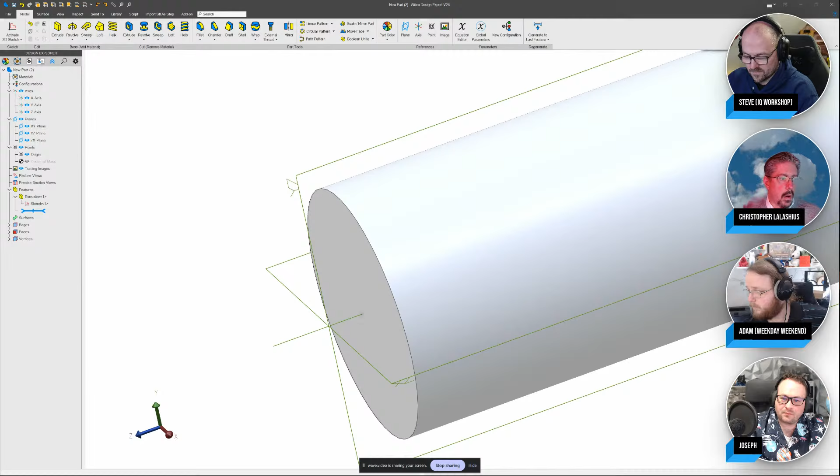Now, okay, so AI had finished what it was saying, and let's just see how cutter comp works in EZ-CAM, basically going over what I've just described.

I'm just looking for certain things. I want it to output something for me, and so let's hope it does. Quite a bit of detail, doesn't it?

Yeah, you can also save it to PDF, and you can copy it. So if you want to save it to a PDF and keep your questions listed, that's one way of organizing. So when somebody sends me a question in email, I just copy and paste it in here, and I get the answer, and I send them over a copy or a PDF file. There you go.

Yeah, it's telling me a little bit more. The last thing it said, it took me a while, it bit me quite hard on one of my first jobs, that FANUC only activates it on a linear move. Oh, you know what? I'm in the wrong, I'm in post processor mode here.

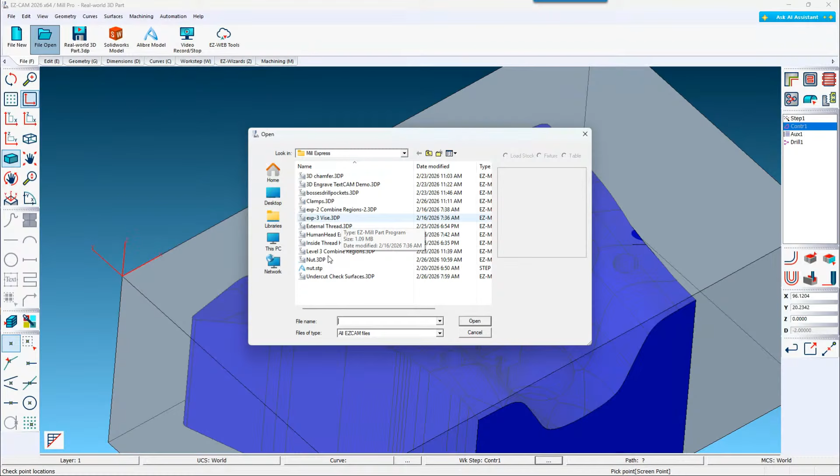So you can have the table as a fixture, all of your clamps, the posts. I opened it on top. This is another thing people might get hung up on, and this is as intended. You have your model open, and then you go to File, Open. Whatever you open is going to overlay on top of the model itself. So you want to be sure, if you're going to open a file, am I opening it for clamps or fixtures? Do I want to add that to the open document? And here I did not.

So to show you real quick how this works, let me delete that one. I'm going to go to Pocket. I'm going to select this face, verify it. Okay, so if we look at a top view, you can clearly see we're going to crash our part, or our fixture rather.

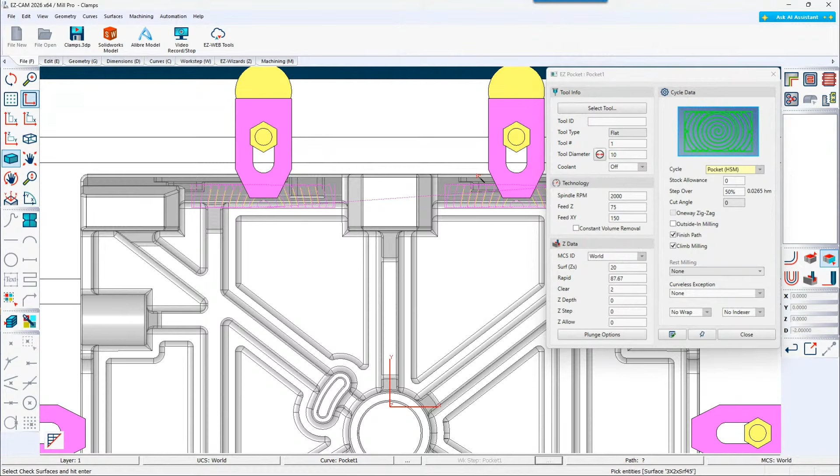Then I go to what they call check surfaces. I want to check up against these two faces, or you can include the whole clamp if you'd like. Verify again. And you can see the modified toolpath - it's not going to violate the clamp.

That's cool. If I go in the background, come over to 3D cycle data, these are my check surfaces, those are my clamps. And if I add an allowance, let's see what 3 millimeters is going to look like. So you can see the center line of the toolpath - that's what this is. Also, this is the high feed return for the next pass.

So let's verify that - you can see now it's farther away from the clamp itself. So these check surfaces give us more control. That's something new, I think it might have been introduced in the last version. So if you guys aren't up to date, I recommend you do that. Thought I'd throw that out there.

Hey, thanks, Chris. I like this feedback, I'm really liking it. Yeah, I wanted to highlight that comment as well, Joseph. Good feedback from a user.

EZ-CAM is a good option with the 4th axis. Yeah, the personal license is somewhat nerfed in Fusion 360, and you're only able to use 3-axis CNC in there. Plus, you've also got all sorts of restrictions on the types of file formats you can import and output from Fusion. So 100%.

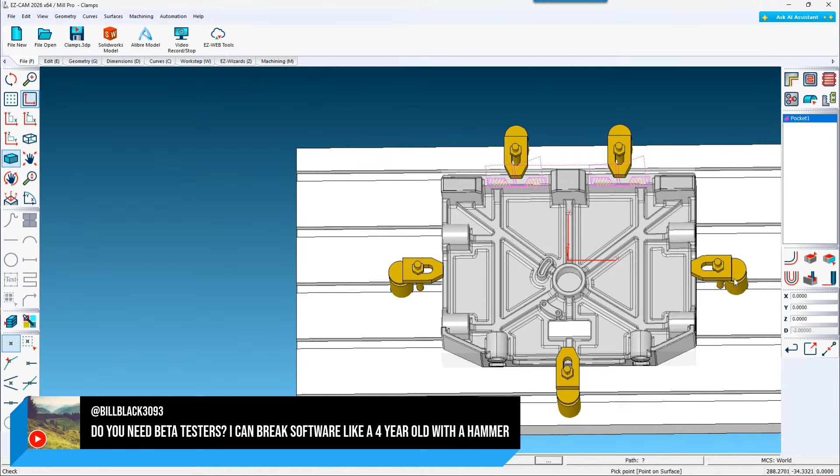Yes, I got to thank you, Chris and Costas. Love that, appreciate that. And good to see you, IQ.

That's Steve, there's a rule of a minimum of 1 freeze per live. And then how can you freeze when you're in Arizona? Great question, I think it might be Adam or Steve. You guys are much colder than me, so we're going to blame you. It's climate change.

Hey, all of it melted for at least a week or two. Now there's only like 3 or 4 inches of snow on the ground instead of 3 or 4 feet.

Right, we have to talk about tacos every live stream. So yes, I was tempted to go get some tacos, but it came back too fast. Yeah, DoorDash, it's not fast enough.

I had one question about licensing. A guy has a computer in one room, a computer in another room, and wants to be able to move between them without manually releasing the license. So there is a Flex license available. This is where I wish I had a sales guy on with me who handles licenses day in, day out. But yeah, I'd say email hello@alibre.com and they could probably talk you through what a Flex license is.

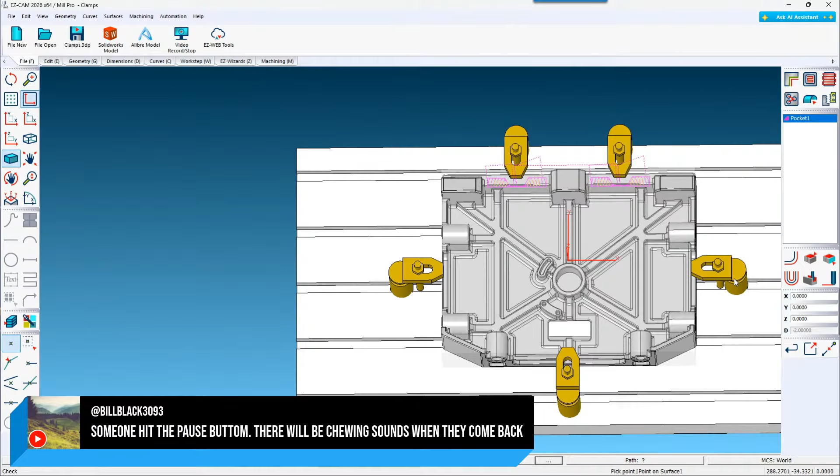I know both computers need to be on the internet. Thank you, whoever found that, for putting that up. And I think there's a fee associated, but yeah, so Flex licensing is definitely an option. And if they call into us, we offer the same.

Oh perfect, yeah, so we got Flex, EZ-CAM, and Alibre. We got that all worked out. Not that you're flexing at all.

Sorry, oh wait, I don't know if I'm... there we go, there you go. All right, there you go. That's the spirit, I think our viewership just went up because of my flexing. So there you go, yep.

I hear you have the right to carry guns in Arizona, right? These guns are always legal, I'll tell you what. Yeah, there you go. By the way, we'll blame Bill Black again for derailing this stream. It was the tacos that got us off the hook. Yes, but keep watching, Bill, we love it.

And can I just try and bring this back in? I want to highlight this. So LGRFBS Chris just showed us an amazing utility of EZ-CAM, but I think the question we started talking about was not about the EZ-CAM toolbox. I think the guy meant the tool libraries. Okay, my apologies, library. All right, well I didn't get it as well in the beginning either. So let me bring in...

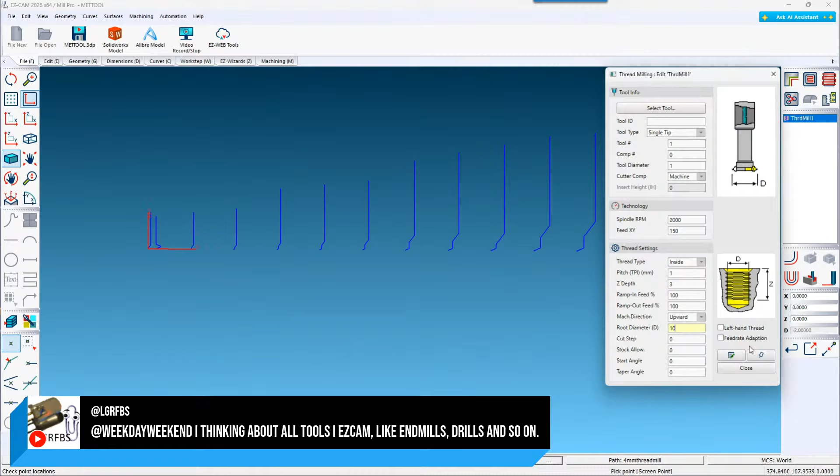So if I go in my library, come all the way down to thread mill, it gives you a picture of your tool, so you know exactly what you're using. So you can set up tools out of the library.

Okay, can I ask now? I'm into my tunnel vision. Squirrel, really sorry, squirrel, really sorry for that, Chris.

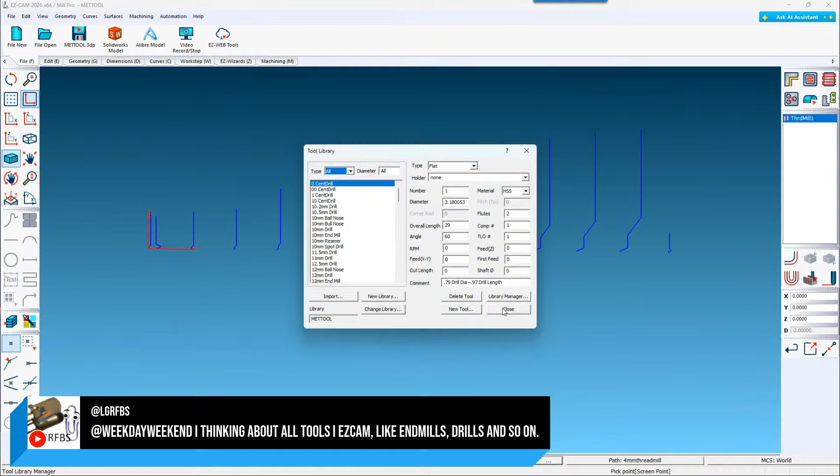But when you make that custom tool, I imagine you show in the simulation somehow if you may have made an overcut, cut into the model instead of just the material. Does that still apply with the custom tools? Can you show that the shape of the tool interfered with the model in the simulation as well?

It's looking at it like an end mill, taking the outside diameter. So if it does... we do have what they call part compare. So if you're going to gouge your model, if it goes into the model, it'll actually show you.

Let me finish up with the library thing, and then I'll show you the part compare. Let me see what I want to get up here.

So let's open this. All right, so we can go into the operation itself. You don't have to necessarily access it, you can access it on the fly. You go to select tool. Here's your tool library. You can pick a tool and load it.

Now let's say I have 2 libraries and I don't want to carry over all the same tools, but I do have what I want listed. A lot of times what I'll do is build a library with the tools I'm going to use, and they'll be available so I'm not picking through all the different names.

You can just highlight it, and just like Word, you can send it over to a library if I had an open library.

This is kind of related to libraries. Here's my 2 millimeter, or that's a 2-inch diameter, we're in inches. Let's say I make some changes here.

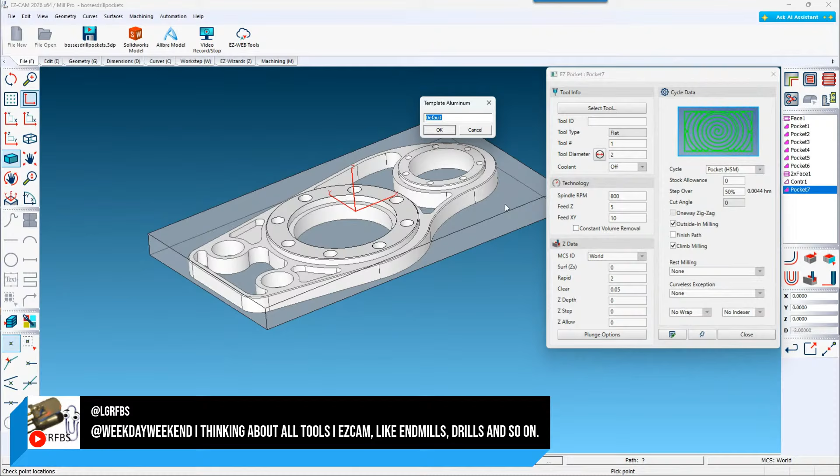So you can actually create another type of library just by going to set as default. I don't know if you follow that. That's very useful actually, strategy templates.

Very, very useful. With my Alibre model and my square stock, let's just flow through all the operations and we'll throw up the simulation.

I'm going to go to stock setup. And in the stock setup, we have create uncut solids. Now, if that custom tool you're using is going to violate the model, you'll catch it here.

Okay, yellow, I gouged the model. Yellow is a gouge, red is stock, green is, of course, the correct size of the model.

So I gouged this. Well, I don't know which operation that is, so I'm just going to double click on it. Oh, that's nice, then I'll just test it. Okay, so this tool was too large.

Now, when you choose contour centerline for a facing pass, if the tool is large enough, let's go with 5 inches. Let's see if that does what I want. Okay, so it's going to take a 5-inch cutter. It knows it's taking 1 pass.

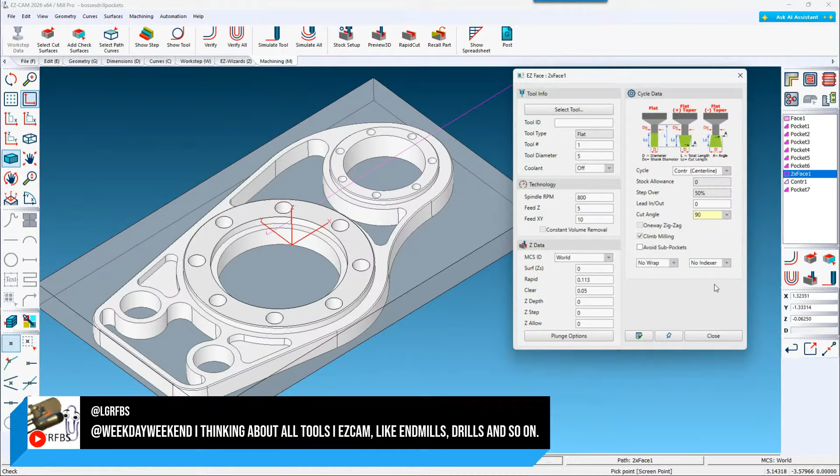Verify, maybe, yeah, verify it again. And now my surface is protected.

So anytime I have a question about something, just double click on it. Now that's pocket 4 over here. That did that kind of work. So if I put in a negative finish allowance—

There we go. There we go. Not bad, huh? I love it when software tells you when you're going to screw something up in the real world. Exactly. Yes, yes, that is.

You know what I loved about that demonstration? You see the colors, you know you gouge there. You double click it and it gives you the strategy. Oh man, I love that. Because in very large parts, when you have maybe 14 or 15 different tools working on one operation, one setup, you need to really remember what's going on. And that little double click, that did it for me. I kind of like that one.

Absolutely. I have a question from a Facebook viewer. We love our Facebook folks. Is EZ-CAM Mill Pro what is labeled as Easy Mill Pro on the Alibre website? Yeah, I guess we went and sent it to our website people, just in case we need to do a rename on the website. But short answer is yes, they are the same. Great question.

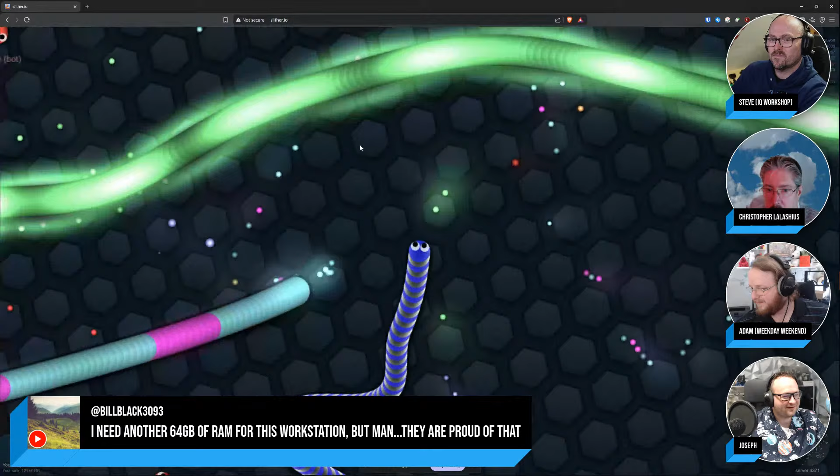You know, I've never live streamed playing a game before, and I'm being very risk averse here. I better start taking some risks.

Listen, if you want to live stream gaming, we need to set you up on Twitch. Twitch is a little interesting right now. It's been interesting for a while. There's a reason I've dedicated my time to YouTube, right? I don't have the aesthetic for Twitch, I'm just gonna say that. I'm way too niche.

I wanna make a comment right now, but I so can't. By the way, Joseph, that would have been a fail in Nokia's 3310 Snake game, right? Going over yourself, you just...

So this is the easy version. Someone asked earlier about exporting a DXF without making a drawing. Is that possible? It is possible. You export it through the sketch environment.

Well, do you want to show that, Costas? I got my screen kind of tied up, you've got your hands full there with the joystick. Okay, let me show you that then. So let's start a sketch, it's going a bit slowly for me.

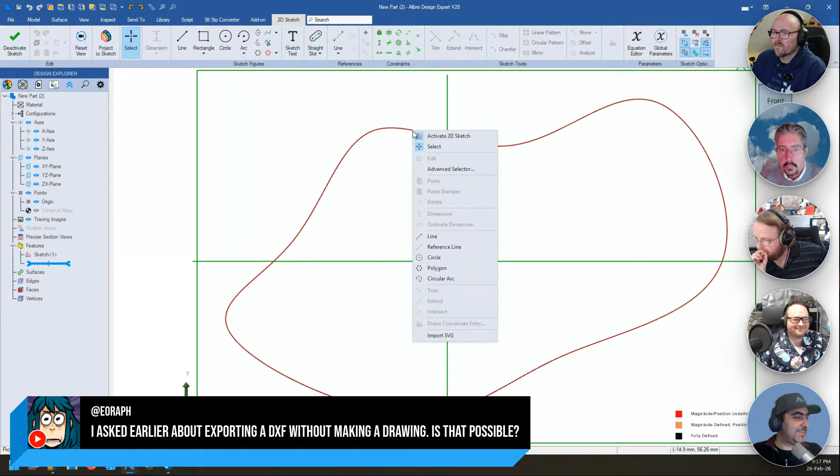Why don't you? For some reason with the stream it's going very slowly. Actually, it seems like you cannot do that. You can export it as an SVG though. Is there a step he's missing, Joseph? No, as far as I know, it's just drawings, but you can do SVGs for sketches. But usually I think you can't do something and then Costas does it, so I didn't want to.

Okay, let me. I need to get... so I have an AutoCAD type software, it's an IntelliCAD clone, but I need to get the key. It's got a dongle key now, so I can't start it. I just wanted to see if I can copy directly from Alibre and it would paste it, but yeah.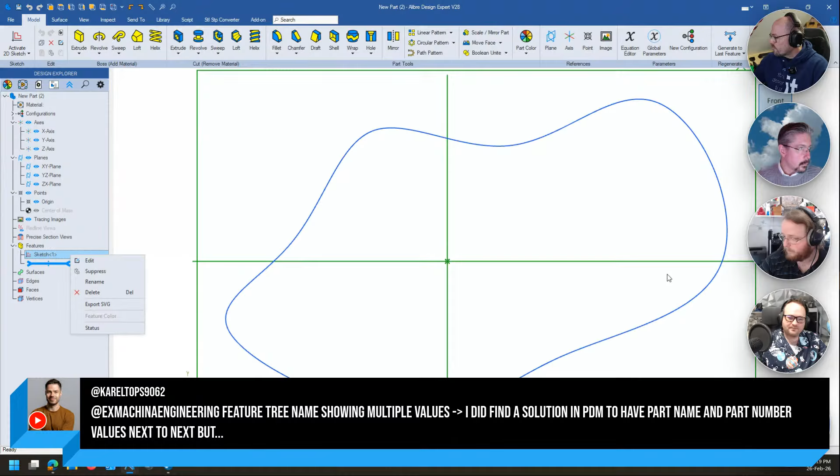Other than that, you need to export it as an SVG, which can be got through Inkscape and turned into a DXF from there. If you don't want the drawing, you export the SVG, fire up Inkscape, open it up, save as DXF, and you're off to the races. That's the only way I can think of right now.

Perfect. And then you saw that comment from Karel Tops? Yep, perfect.

So we can jump back to the big drama that happened while you were doing that, Costas. I was completely circled and about to die when someone circled the one circling me, and then I got out of it. Well, natural selection is also based in lag sometimes, so there you go. Always a bigger fish out there.

We got some more coming in here. I know, I'm trying to read comments and not die here.

We've got a question: sheet metal part cutting length, flat pattern is first step of it. How to get the cut length value to calculate laser cutting length. How many meters does the laser need to cut?

That's an interesting one, that's where I haven't touched. So I know why he's asking that, right? Because at a certain speed, you consume gas to run the laser, but I don't know if the measuring tool can help us there. If I select everything and measure...

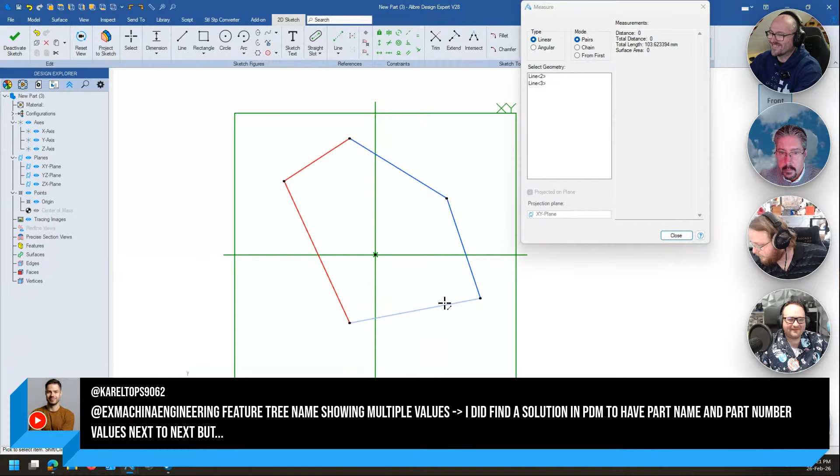Okay, let's see if we can show your screen. Oh no, a chain. There you go. So if you look at this, right, I have my measure tool on. In the mode, I went to chain, and now I am clicking on a bunch of lines, and the total length is updating to give me that length, right?

So I guess what you would do is flat pattern your sheet metal, right? Actually, not flat pattern it, you would unbend it, basically. Do I have a sheet metal part here? I don't. You would unbend it, right? And then you would create a sketch, let's do one quickly. You have to do it from a sketch, you can't do it from the edges of the model. That's the thing.

So if I make this a contour flange, right? Then I unbend it, this is my fixed face, I select all other bends. Now, if I create a sketch... is it frozen on the screen for Costas's screen share?

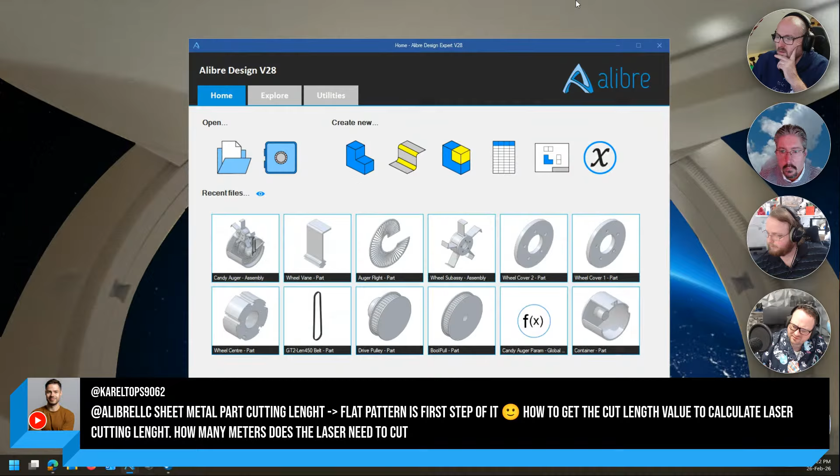No, not for me, so I'm saying just as I'm not seeing what he's doing. You're minimizing and maximizing the file selection, so I'm not seeing Alibre itself open other than the launcher. Yeah, are you sharing? Oh, thank you, Adam, wrong screen. Yes, so there you go, that was all on me.

So what you can do here is you can project to sketch, and you go ahead and you select everything, right?

Thing is, you need to select these little bent tabs. But now you can. Let me see if I can make this more efficient. If I right select... do I need to do that? No, I need to select these two, delete them. Select these bends, delete them, but I still get these side little bends. Then I open up my measure tool, chains. I right click on one, chain select, and that is the total distance.

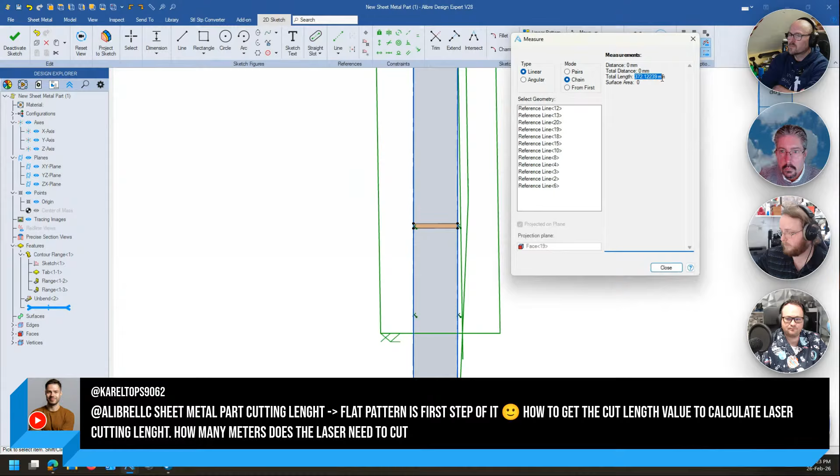The drawback is you can only do that for continuous shapes. So you do that for the outside, but if you have 3 or 4 pockets for the inside, you need to do each one separately, and keep the measurement somewhere and add them up. I guess you could write a script to do this. But yeah, measure chain mode, and then you will get the total length of all of your selections, and that's how you do that.

I hope that helped. I like this one from, I think it's green plastic watering can.

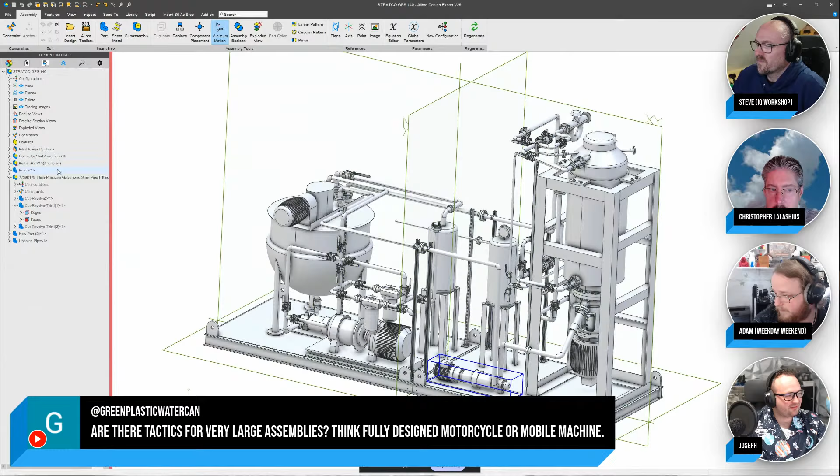One of my favorite tactics for very large assemblies is we can break these down into sub-assemblies. So I can choose edit in a separate window, and then all of a sudden I've got a sub-assembly that's a lot easier to deal with. This is so large that it's going to take a moment. Even all the threads in this are actually threaded with physical threads, so this is kind of heavy.

Well, I guess that's the point of the question. But I can pull this up in a window, and all of a sudden I'm at half, and then I have a sub-assembly for the things inside of this one. Being able to break it down into smaller pieces can increase performance and let you work on things. That would have been a black panel of death in Fusion right there. Oh, really? Oh, yeah, it's so annoying, man. You don't need physical threads, but McMaster Carr gives you the best of the best, so...

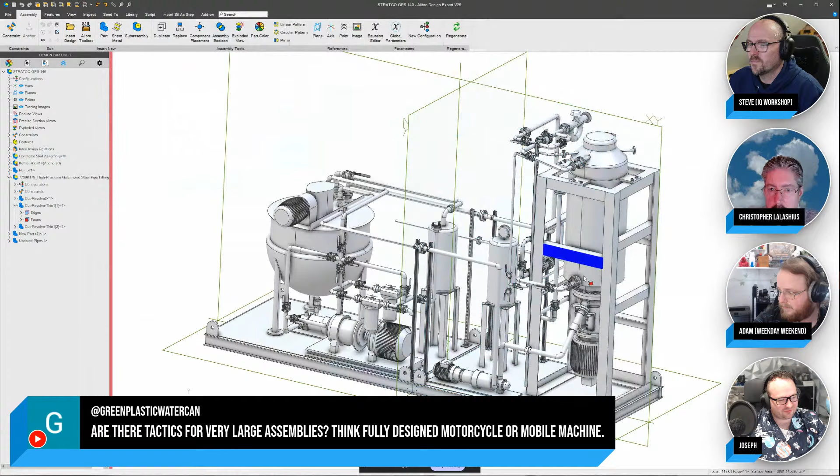So, in other words, break it down into sub-assemblies. That's my favorite tactic. That's always a best practice. Yeah, for sure, for sure. So we can just kind of go down the nest until we get to our raw components. Nice. And even from a top level assembly, I can still easily take something from a subassembly and just edit that one component in the context of the assembly still. Nice.

Here's a good question for, I think, for you, Chris. Does the raw stock methodology shown work in EZ-Mill Express? And by the way, green plastic watering can, let me know if that answers your question or if there's any follow-ups that I can do. But what do you think of that, Chris?

Oh yeah, absolutely. Everything I showed you about creating custom curves, creating solid models, whether it be in Fusion or if you have an existing STL, it has to be an STL model if you're going to use them as fixtures and clamps. But EZ-Mill Express supports it.

Gotcha, nice. Along with multiple stocks as well, and multiple fixtures. So you have your G54, G55, and so on. I think it's E1, E2, and so you have a base fixture, and it just gives you the programs that have all the fixture offsets included. So if you have multiple vices, multiple stocks, that's available. Perfect.

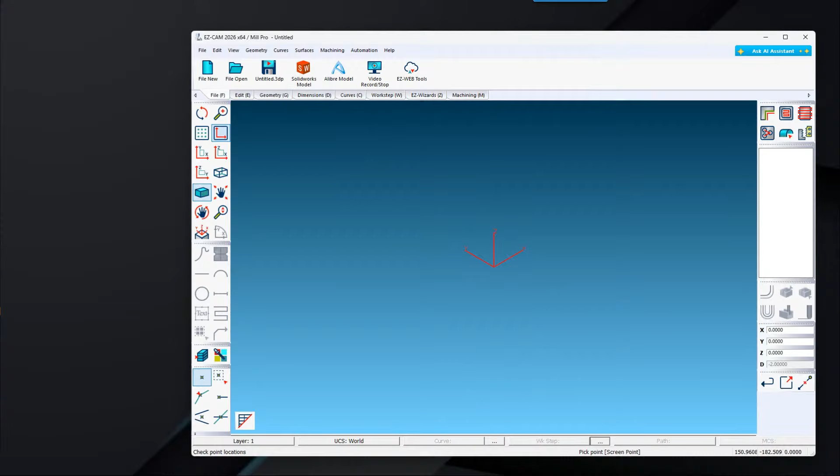It's better, which I found. Thank you. Use measurement tool, chain selected surfaces. Wasn't accurate, but best I found.